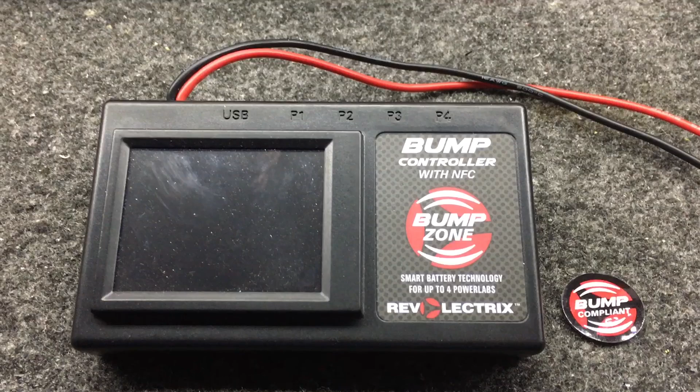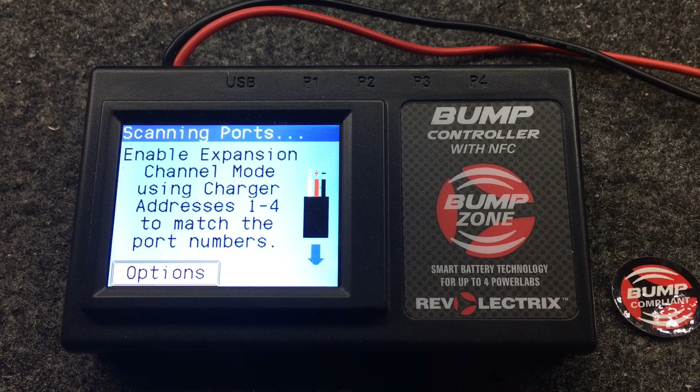Today's video is about the Revolectrix bump controller. And this is what the unit looks like when it's not installed. Now, whenever you see it in our case, it's always flush mounted. We're gonna go ahead and power it up. So it's an LCD touchscreen. It will control the Revolectrix PL6, PL8, and PL8 Duo chargers. So now we're going to go ahead and show you how to set up a case from scratch.

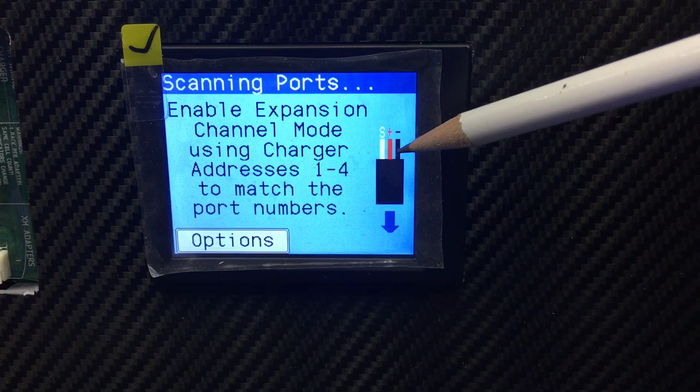So this is the bump controller, and this icon right here is showing you your JR cable coming in from the back of the charger, and it's showing you that the negative goes on the right. So when you look at the top of the bump controller on the inside and you've got 1 through 4 cables coming in from channel 1 through 4, this right here is showing you your negative is on the right.

And then when you look at the charger, you see that your ground is on the left. So you have a port on the back of the charger, and just remember that ground is there on the left hand side, and when you're looking at the bump from the front, it's on the right hand side. Revolectrix did a really good job of making it so simple you can't miss it.

So after you have your bump controller connections made with the charger, go ahead and hit the increase and decrease buttons at the same time and hold them. It's going to let you go into choose task. We want to actually decrease down till we get the charger options. Enter. It's on primary channel now. We want to go to expansion module 1. And then the bump controller instantly sees it.

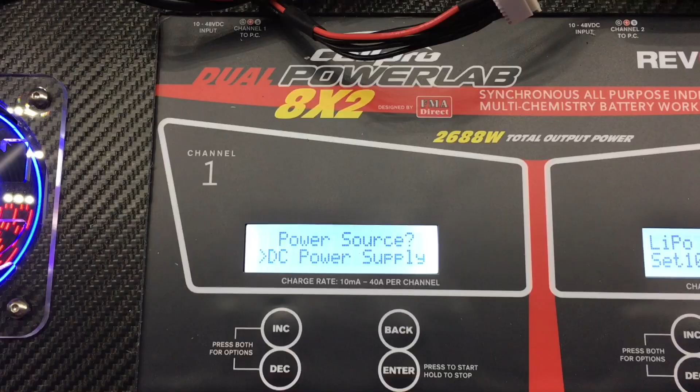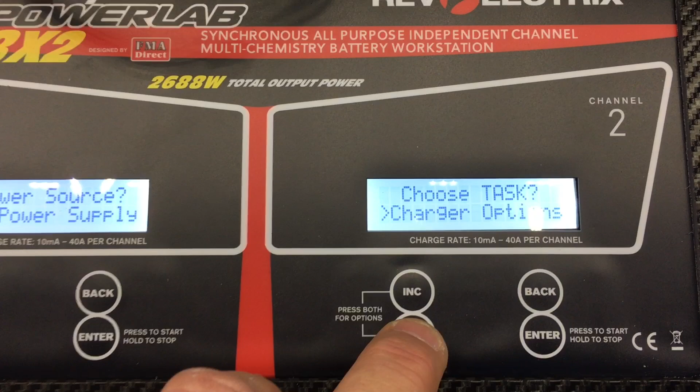And so then we'll come over here and we'll do the same thing. Hold the increase and decrease down, bump down a couple times. You're going to get charger options, enter primary channel, expansion 2. Then you'll see channel 2 show up on the bump controller. Now if you're running 2 Duos or 4 different singles, they'll all show up at different tags at the top. And you can toggle back and forth.

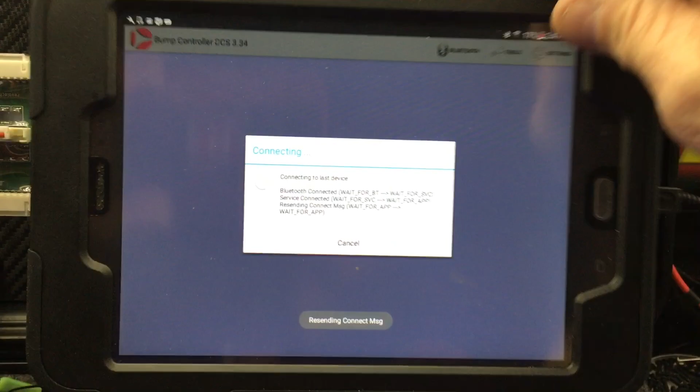So now the first thing we're going to do is update. Now the easiest way to update without having to pull out cables and stuff like that is to lock onto it with a Bluetooth device. This is an Android tablet. And it's asking us to let us lock onto it, and that's all done with security. So now instantly, look what it's doing. Upgrading bump controller version 2.36. How easy is that? All you have to do is just lock onto it for the first time.

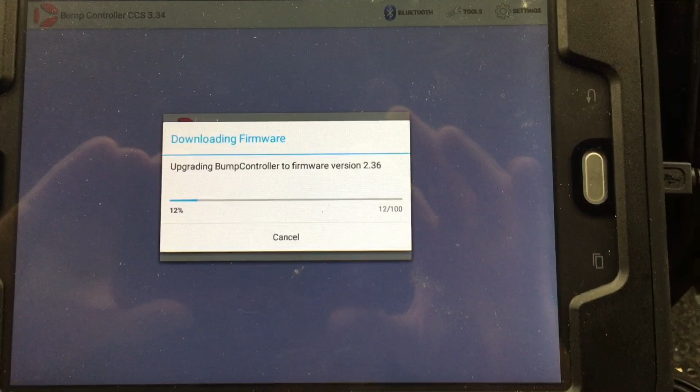Now this is an Android app. You can get this from the Google Play Store, $12.99. There is an iPad app coming really soon. There's the big girl right there. That's the iPad Pro 12.9. And we are running one of the beta versions. But the Android is available right now. Works flawless. It's a great item.

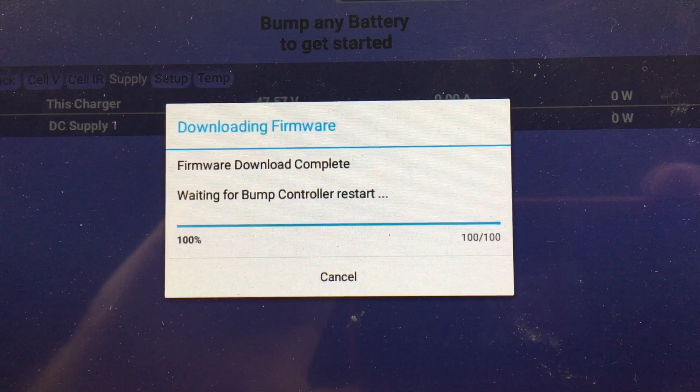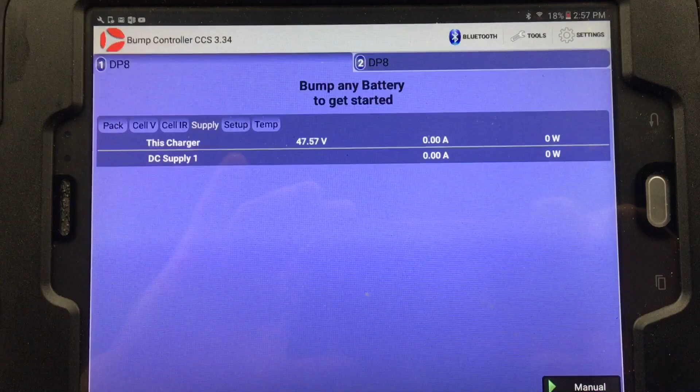Like I said, you can't ask for any easier way to update firmware. When the update's available for your tablet, it'll tell you. You hit update, next time you lock on, it updates it. Now it's version 2.36. Connecting the Bluetooth to the last item, which is our tablet. We're good to go. So now that we're already set up, if we've already got a bump compliant RFID tag, we can just bump it and it shows everything right on the screen.

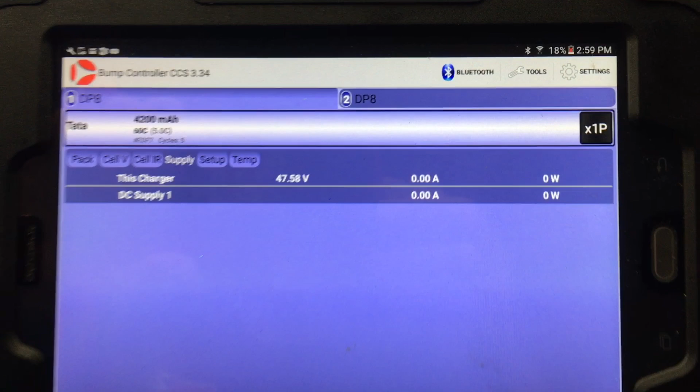Now we're going to go ahead and set up one from blank. So we'll go ahead and back out of that. And if you notice, everything shows up on the tablet also. They're locked Bluetooth. So now we're going to go ahead, choose that one, and clear it out. So now we have a blank RFID tag. You can buy bags of these things, 24 of them for $30.

And we're going to go ahead and bump it. We're going to hold it up there. Now it's saying that it's a new bump tag. So what we want to do is go ahead and set it up. Now we're doing a LiPo. The cell count is 7.

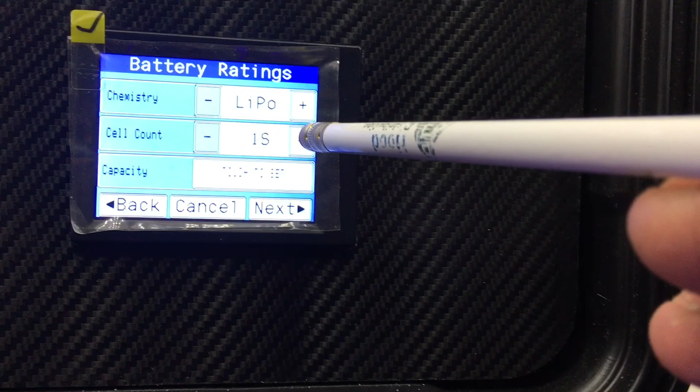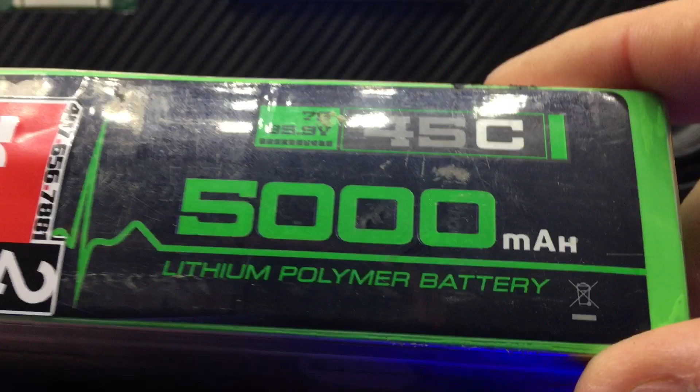And yes, we're doing a 7S pack. And what we want to do is we want to keep everything accurate to what's on the label. So it is a 5,000 milliamp pack. Now you want to keep everything accurate because that's what the processor in here uses to set everything up.

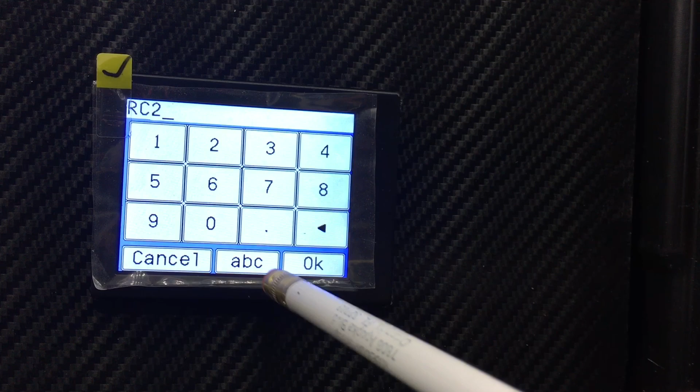So we're going to put RC2, and that's RC2 pack C rating. Now this is a 45C. Once again, you want to keep everything accurate. This is how it knows all the IRs and all the calculations that it comes up with, is by the information that you put into this pack.

Now cell volts is 4.2. It's not a high voltage pack. Cell volts minimum is 3.30. One pack. If we were running a stick pack, say for a large 700 class helicopter or a big plane that has 2 packs together, you can set it up to where when you bump the one tag, it knows that you're putting 2 in.

Now, internal resistance. If you do not know how to calculate this, or you don't have something you're trying to reach, leave it as default. Caution, battery ratings can only be set once. Now, when we burn this tag, it's going to be permanent on this tag. You can only use this tag once.

So let's continue. Accu charge rate. So I'm going to put my accu to 1.5C, my normal at 2C, and my fast charge rate at 2.5, which I never use 2.5. My discharge rate, 1C is fine. These are the voltages that we want to go to. Storage charge. So when I tell this thing to do storage charge, it's going to set my cell voltage to 3.85, and it's going to use the default accu charge to get there.

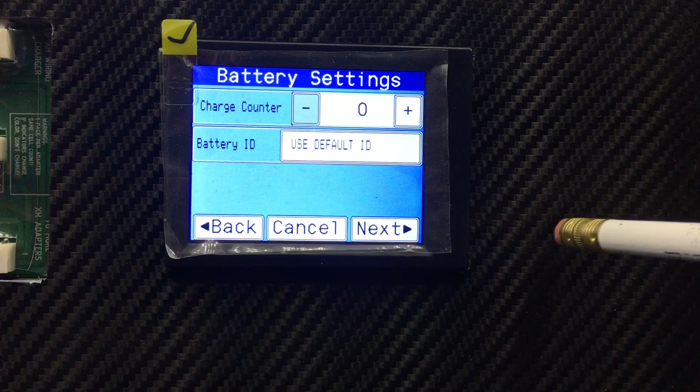Charge counter. We're starting this with 0. Now, if we want to change it to something else, we can. If we've got a LiPo that we know we've already put 37 charges on, 32 charges on, we can put it to 32 or 37. So battery ID, I'm going to use the default. You can actually put a number in there. My battery settings, we're good to go.

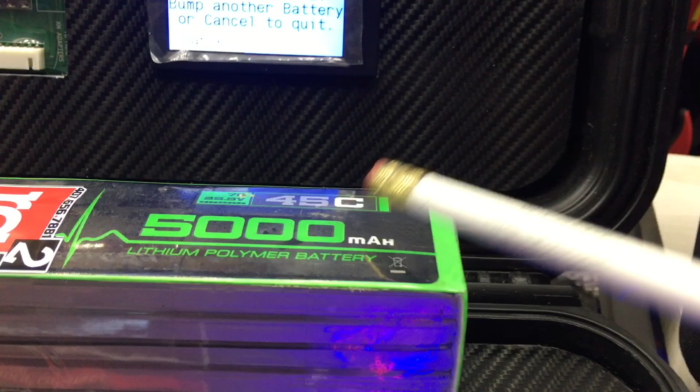Now what we want to do is we got to take our new tag, and I haven't stuck it on the battery yet. I got to hold it up there and keep it there while it writes the information to it. Now this is a pretty ingenious little thing that they got. If I have 14, 20, 32 of these batteries and I want to go to another one, I can actually just bump the next tag and it'll use that information off of this pack onto it.

So say you're a commercial company and you use the same exact packs and you buy 20 at a time. Once you set up one, you can bump 20 tags and write all 20 tags, but make sure it's the same chemistry and the same information. So after we're done, we just hit cancel.

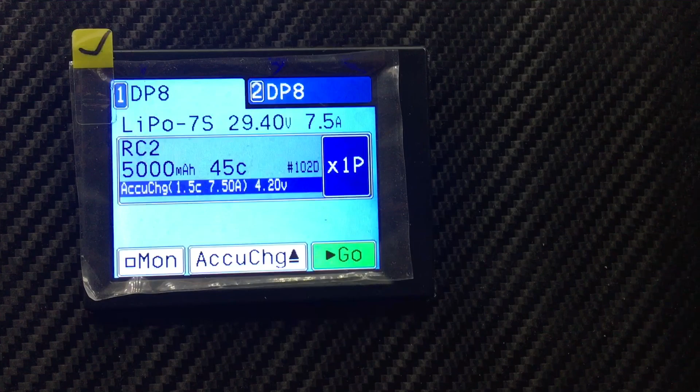So now I've peeled the back off and we're going to stick it on here. And then all we have to do is bump it. And it knows the information that we just put into the pack. It's the RC2 pack. It's a 7-cell, 5,000 milliamp, 45C. And then the information actually jumps right up onto the tablet. So let's make a connection and do a charge.

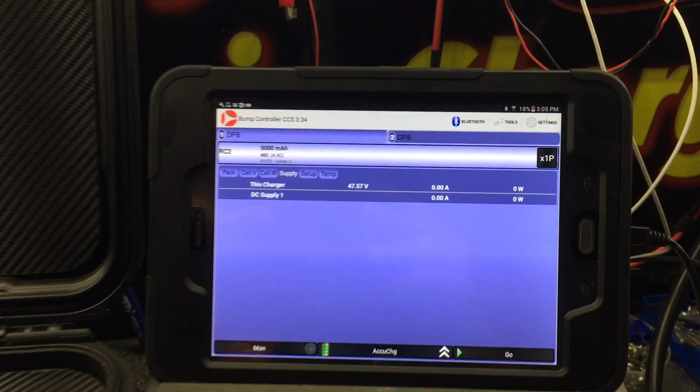So now that we got our pack all set up, it's been bumped. We can either go to the tablet or the bump controller and tell it to go. It'll check the pack. If it's happy, it'll charge. If not, guess what? It's not. Well, this is the #1 phone call that I get from everybody about these.

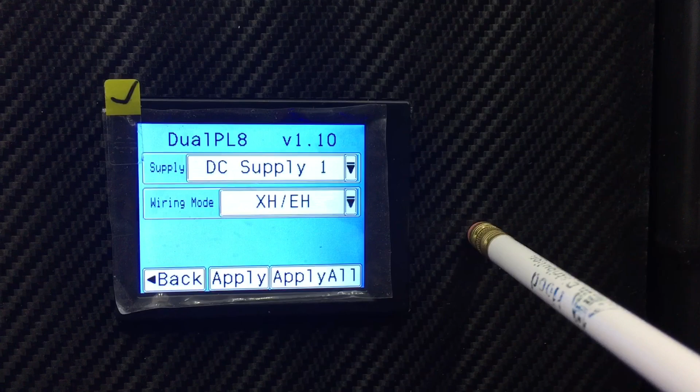So port 1 options, DC power supply. Go in here, wiring mode, XHEH. Apply all. It will update the chargers from the bump controller. And now we're good to go. So try #2.

So now that we've set up the balance connector wiring, we can go ahead and hit go, because the packs and everything, or the bump controller updates the chargers, everything's ready to go. And then with the tablet right beside us here, you can see all the same information you see on the screen, just in a bigger version.

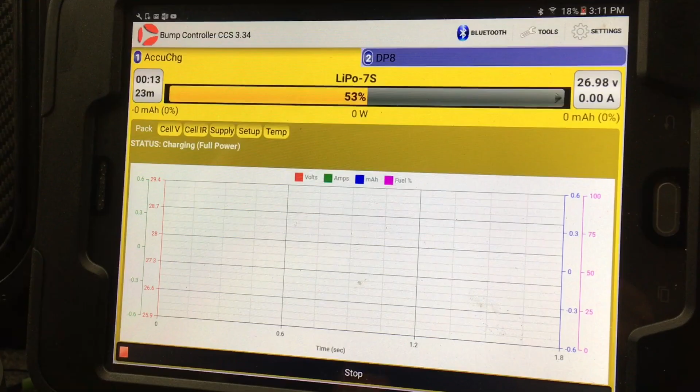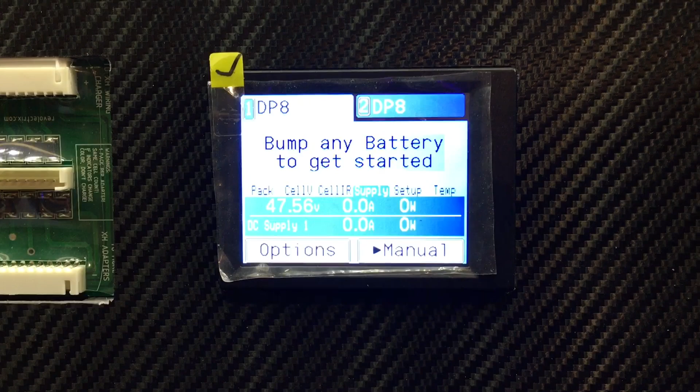So when you're done charging for the day and you unplug your case, everything shuts down. The next time you go to use your case, when you plug it in, you'll see your normal startup screen. And if you're running the tablet, you'll just go to the Bluetooth and reconnect. You already locked onto it the first time. You don't have to re-pair or anything. You're good to go.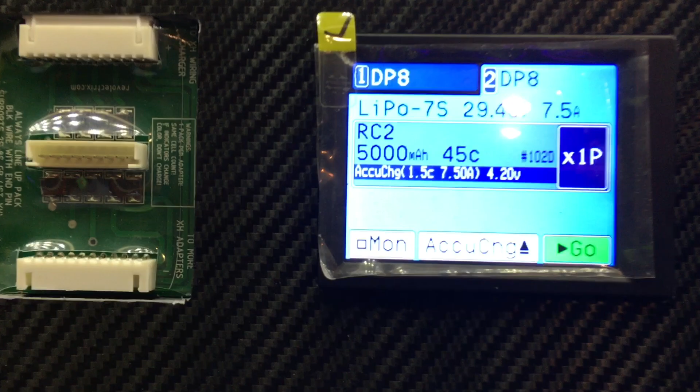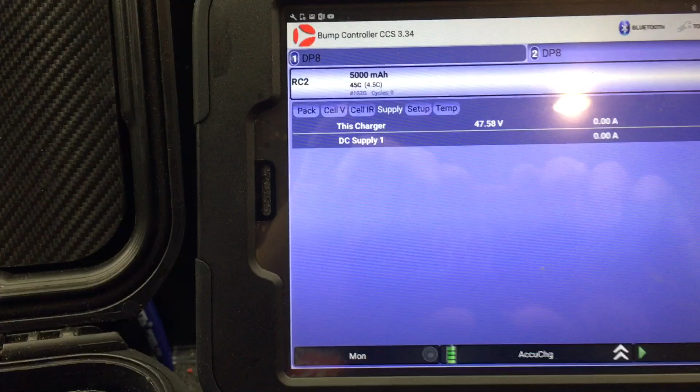So the last time we charged, we were on channel 1. Well, we want to do channel 2. It's just as simple as touching channel 2, bumping the pack, RC2 5000 7S. Once again, once you have the pack connected, go up to the bump controller and hit go. But we're going to go over here. We're going to go to channel 2,

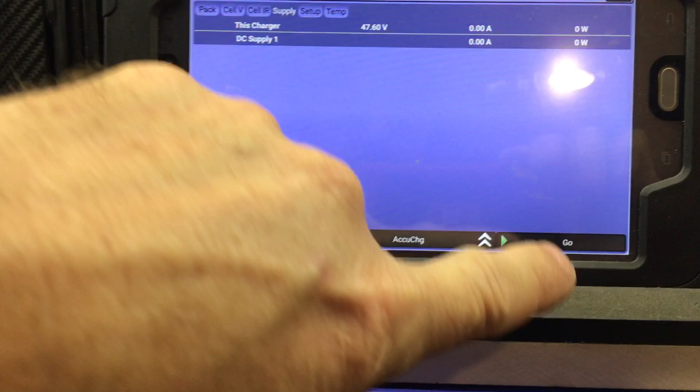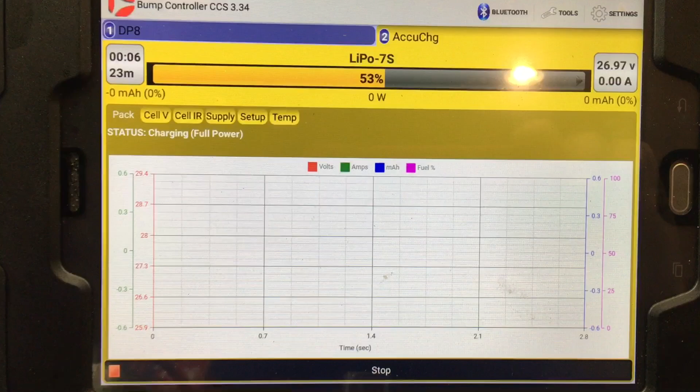AccuChg. We can make any changes we want to from here. So we're just going to choose AccuChg, then go. And you'll actually see the bump controller. Everything's set up. Now we're charging. You'll see the graph show up, and pretty soon we'll start getting feedback.

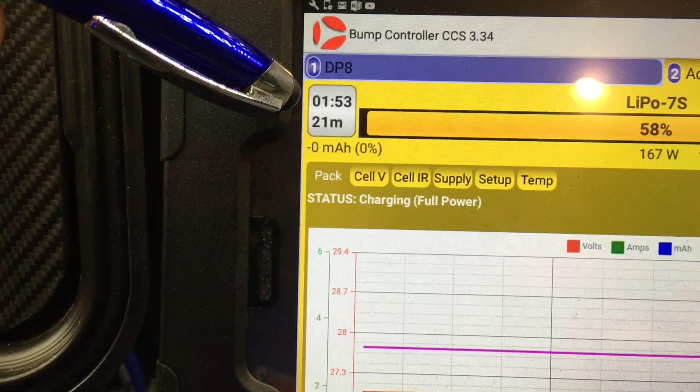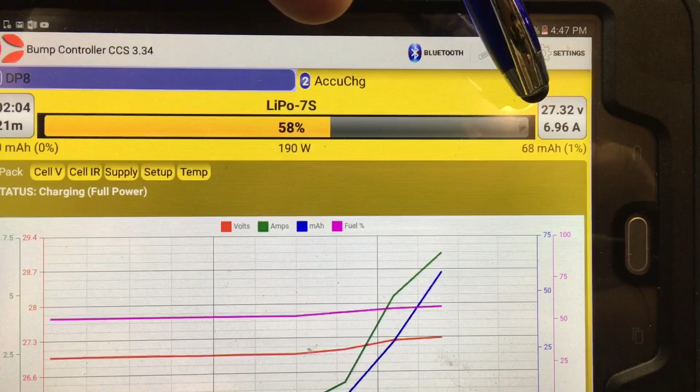So now the charger's been running for 1 minute 53 seconds. It's estimating 21 minutes to be done. We're at 58% charged, 27.32 volts, 7 amps is what we're putting in. Now you're starting to see a graph reading of everything that's going on.

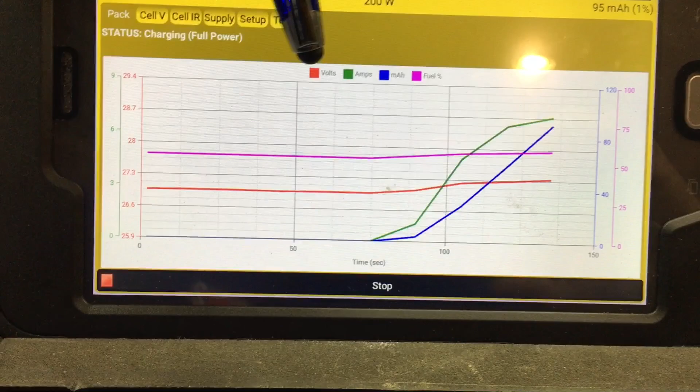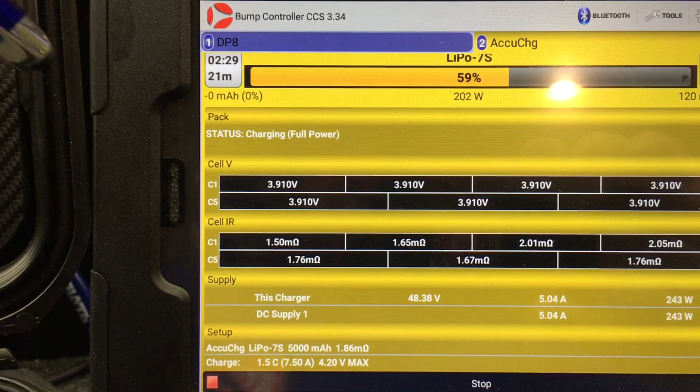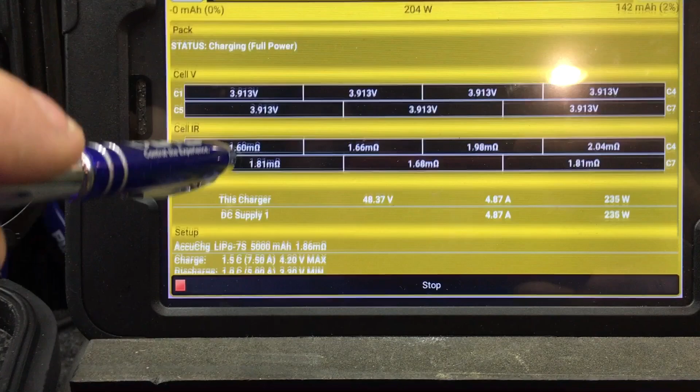So the red one is volts, and you got a little table right here telling you. Green is amps. You see the amps ramping up. Milliamp-hours that you're putting into it, amount of fuel in the pack. Now you can click on these different settings down here, and you could read everything that's going on. This is the pack. We're showing all your cells, your IRs, everything right here on the graph.

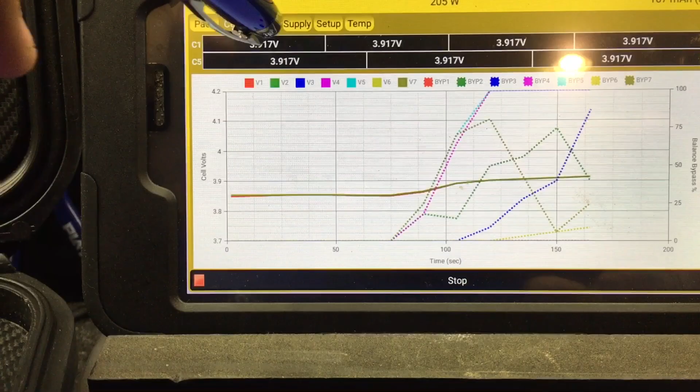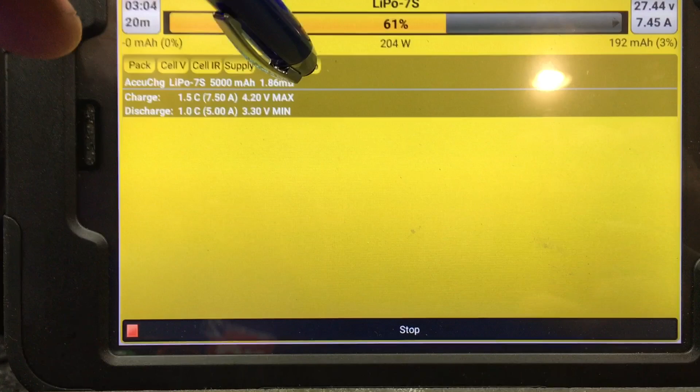Or you can do single graphs. Cell voltage, very important, your cell IR, you get a good accurate IR rating. Your power supply tells you kind of like what the power supply is doing. Your setup and your temperature. So you get really good feedback.

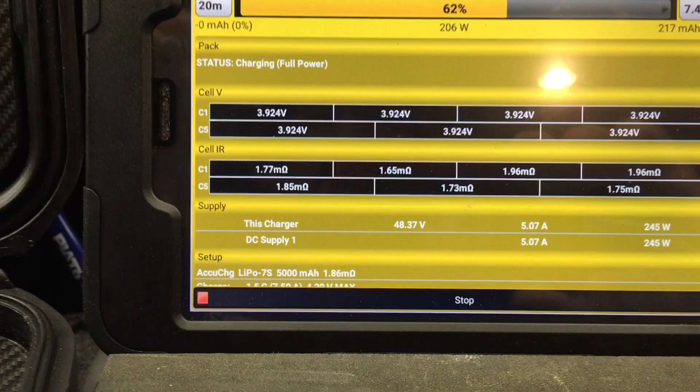When I'm charging, I like to hit the pack button twice like that, and it just gives you the cell IR and the cell voltage and everything all in one shot. And then at a quick glance, you can see the bar up here, how far you are on your charge.

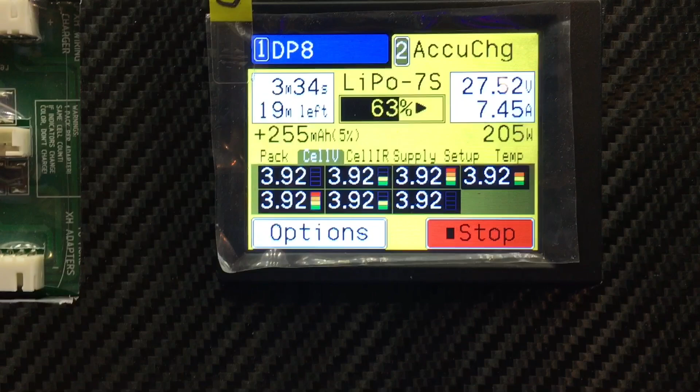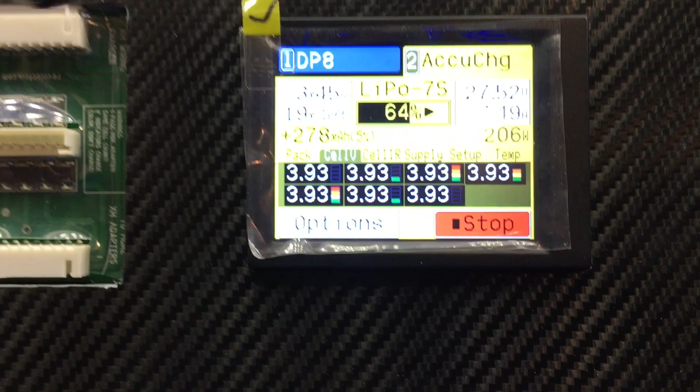And then if you're just going to run the bump controller, you can still do all the same settings in here and get all the same information you can off the tablet. You just don't get the fancy graph schmaff, fancy dancy, whatever. You know, the cool stuff. The stuff that makes everybody go, I gotta have it.

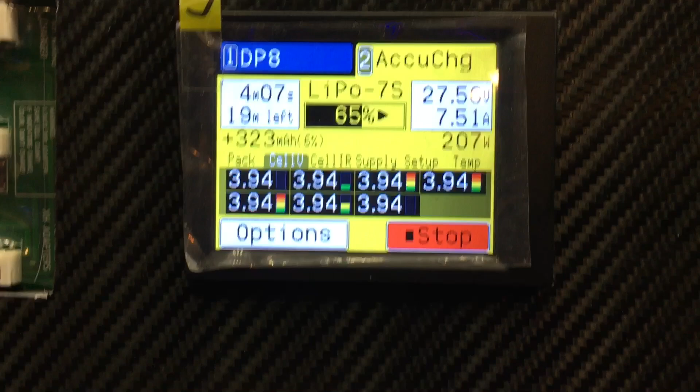So while this is going, we can go over the other DP8, the channel 1 out of the DP8, and then we can bump a LiPo and start charging on that very easily. And you can see it, it'll come up on the tablet as channel 1 also.

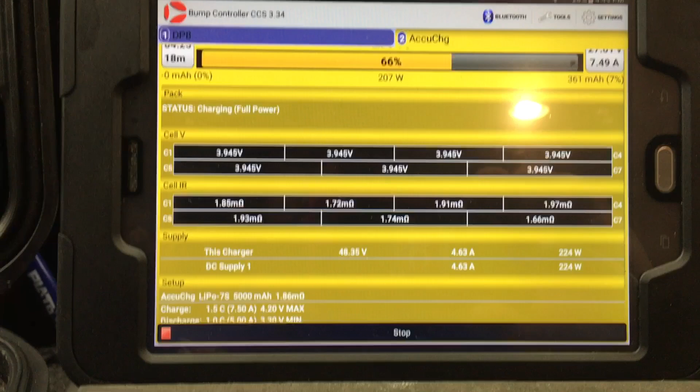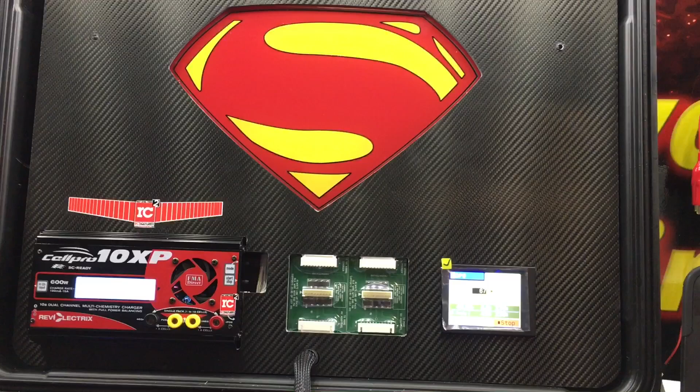If you're going to parallel charge, which I'm not a big fan of parallel charging, you would bump each LiPo that you're putting on so at least the bump controller can keep charge count for each time you charge a pack. Plus you also want to let that charger know that you're paralleling, and by bumping multiple tags, that's how you're going to do it.

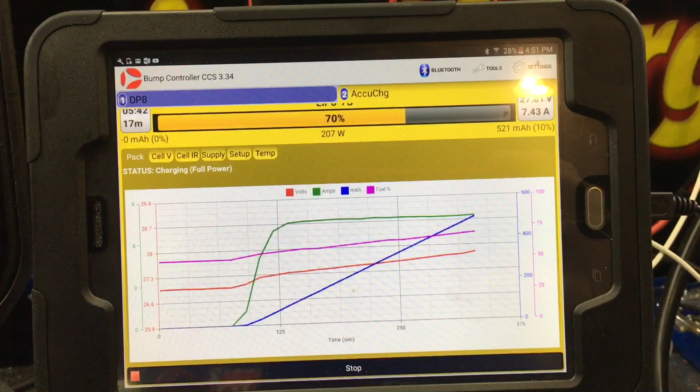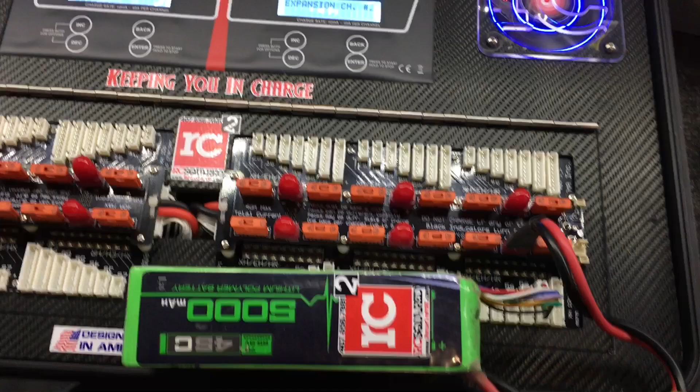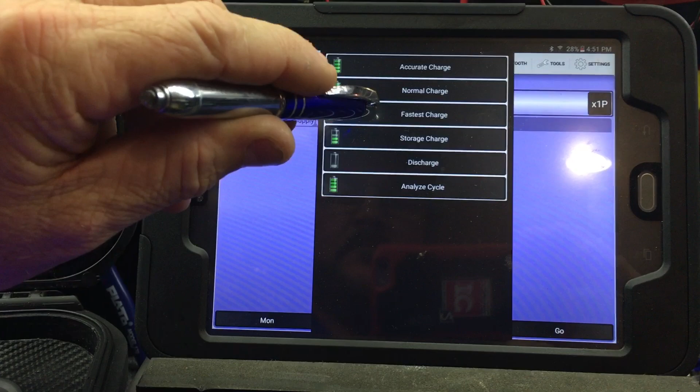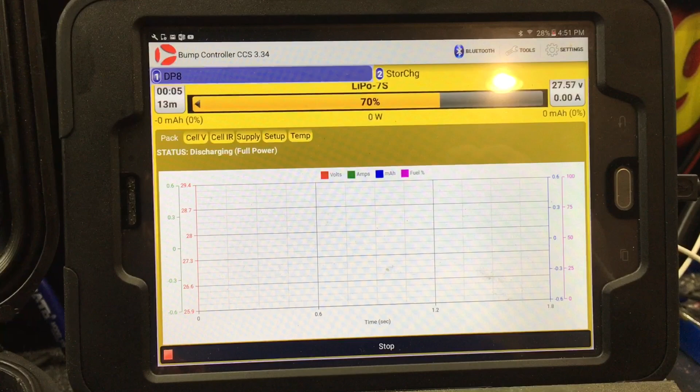So say you're charging away and you decide you don't want to fly or you don't want to use that pack, you just hit stop, charger shuts down, everything's done. It's a great safety feature. Now I can turn around and go right into storage charge. I never cleared out the pack, so it knows what pack is on it via the bump. And now we're going back to storage.